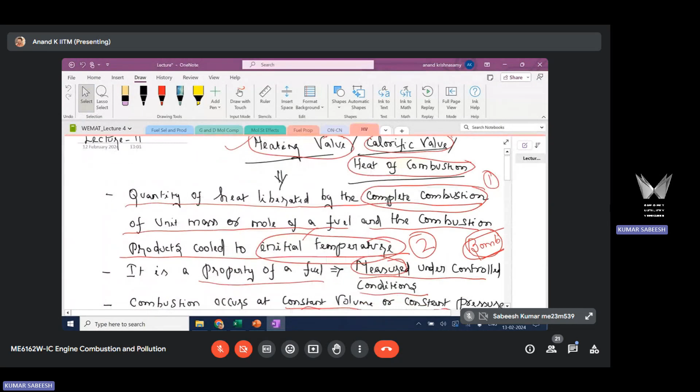But when you use an instrument like a bomb calorimeter to measure the heating value, you are actually measuring higher heating value. So you need to know how to convert this higher heating value into lower heating value. This is what we discussed in the last class, so now we know how we can do this conversion.

This is higher heating value on the left hand side, and on the right hand side you have lower heating value plus heat added by recovering latent heat of vaporization. When you condense vapor into liquid, heat is liberated - this is opposite to what happens when liquid is converted to gas, which absorbs latent heat. That latent heat, liberated from H2O, is added to lower heating value. This is how you get higher heating value.

So in the efficiency equation, you need to use this lower heating value. You need to know how many moles of H2O are found in the product - this is the only information you need. To get this, you need to know the molecular formula of the fuel.

So this is how we define the first law efficiency: work extracted by burning unit mass of fuel with respect to thermal energy released by burning unit mass of fuel. Work is not measurable in an IC engine context, so we use this fundamental equation and express it in terms of power. That is the second form of first law efficiency or thermal efficiency: power divided by m dot f into q with subscript c. This is the heating value, and we need to use lower heating value, as discussed.

After this, we started our discussion on adiabatic flame temperature. This is again one of the important parameters you need to know. This is the maximum temperature reached by the combustion product - a theoretical or hypothetical value. Then why are we interested in this theoretical or ideal value?

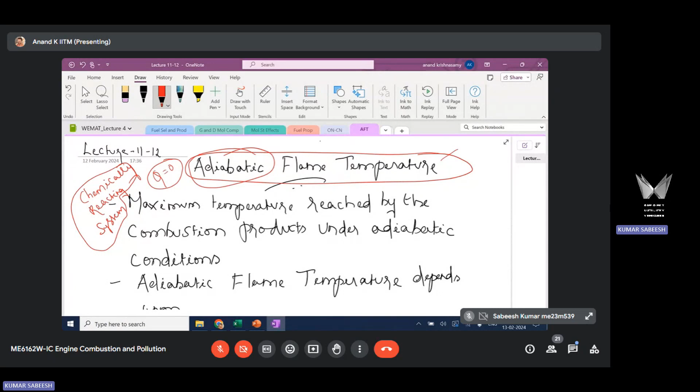So the temperature reached by the product after the combustion event is going to be maximum. That's why we say this is the maximum temperature reached by the products of combustion under adiabatic conditions, wherein there is no heat interaction between the system and surroundings - Q is 0.

We are interested in getting an estimate of this adiabatic flame temperature for two reasons. One, it will help us carefully choose the material to design the component for longer durability. Second, this temperature value also affects pollutant formation. Later on, I will discuss how the temperature value affects pollutant formation, but the temperature reached in the combustion system is vital information required to know how much pollutants are formed.

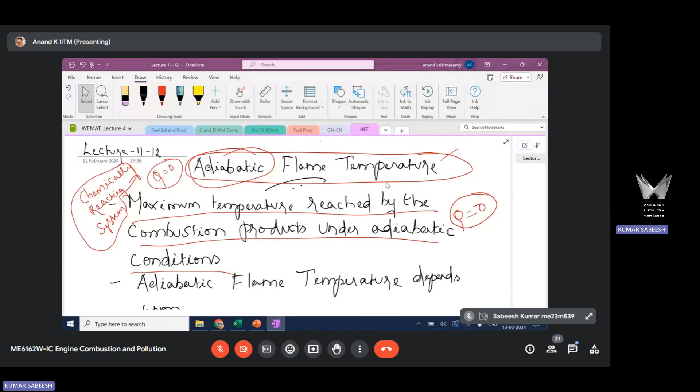For example, NOx, oxides of nitrogen, are highly sensitive to in-cylinder temperature. The maximum temperature reached in the combustion system fixes the maximum value of NOx formed in the system. So from the pollutant formation perspective, we need to know this temperature. From engine design perspective also, we need to know this temperature.

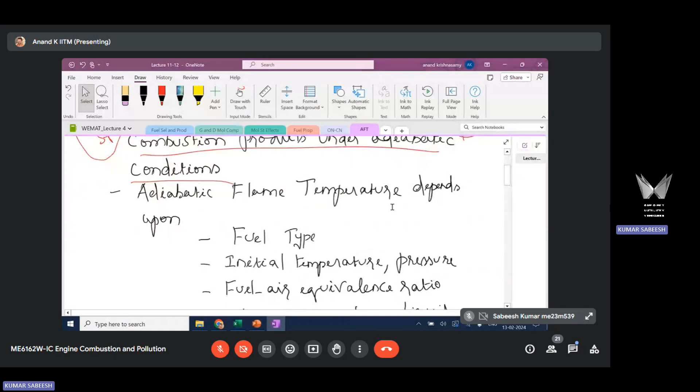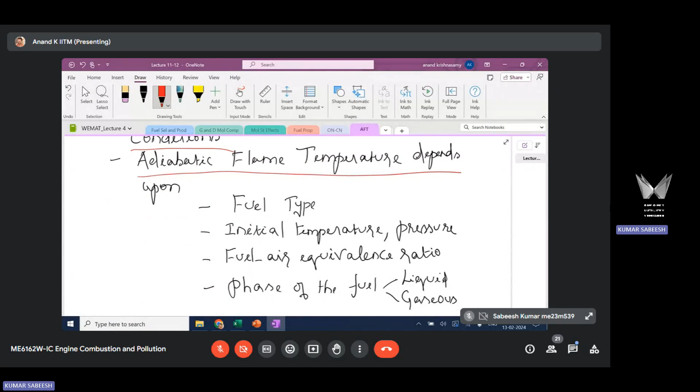That is the usefulness of this parameter, and that is the reason why we are focusing on how to get an estimate of this temperature by applying the first law. So now, before we see how we can derive an expression or estimate the adiabatic flame temperature, we need to know what variables influence this temperature value. So this adiabatic flame temperature depends on certain variables.

One of the important variables is fuel type, because the type of fuel that undergoes combustion fixes the maximum temperature value reached at the end of combustion. For example, if you combust gasoline or diesel, these are hydrocarbon fuels. They have a fixed value of carbon and hydrogen, and because of that molecular composition and structure, energy is released. So what is the energy source, the thermal energy source?

So when you talk about thermal energy released in combustion, what is the source for that energy? It's basically burning of fuel, sir. So you can say fuel is the energy source. When I say fuel as energy, what energy are we talking about in terms of fuel energy? Enthalpy of formation, sir, or chemical energy, right?

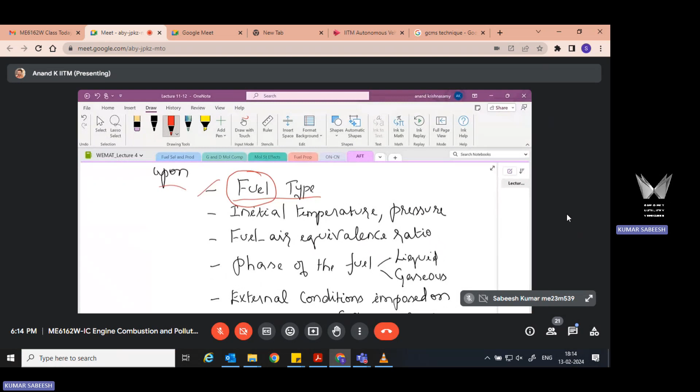Fuel as such possesses carbon with a particular molecular structure, so these are basically compounds. A compound is formed from an element through bonds. So it means some energy is already spent to form a compound from an element, and that energy is what we refer to as enthalpy of formation, or chemical energy.

During combustion, that energy is released as heat, and it appears in the product temperature, which slowly rises because of this thermal energy release. So we can say fuel has a strong influence on the temperature reached at the end of combustion, because fuel is the energy source. Depending on what type of fuel you burn, the temperature reached during combustion depends on it.

For example, if you burn diesel, you get one temperature. If you burn an alternative fuel like ethanol, as I said, it's used in the US along with gasoline, you get a different temperature, because the molecular composition and structure of those fuels differ from hydrocarbon fuel. Fuel is one of the important variables — this is what we refer to as adiabatic flame temperature.

The second variable is the initial temperature and pressure of the system. Again, system means a fixed mass of matter. Depending on the initial conditions of the system, temperature and pressure, the final temperature reached at the end of combustion depends on it. For example, if you look at the engine context, fuel and air, if it...

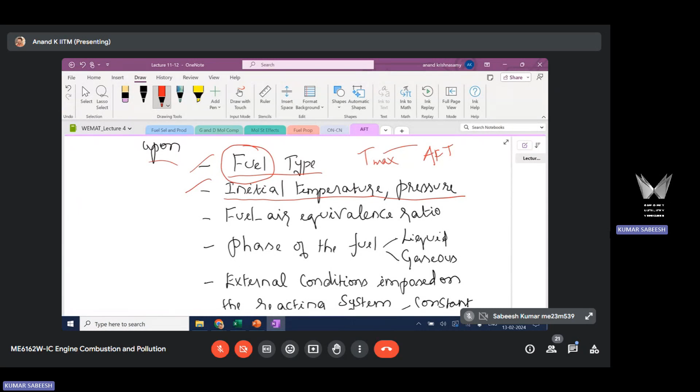If you provide any preheating before it is sent into the engine cylinder, it increases the final temperature. Similarly for pressure — pressure can be ambient pressure, but if you use a turbocharger or supercharger, you increase the initial pressure. Once you increase the initial pressure, the final flame temperature is also higher. So based on the initial temperature and pressure conditions, the maximum flame temperature will be different.

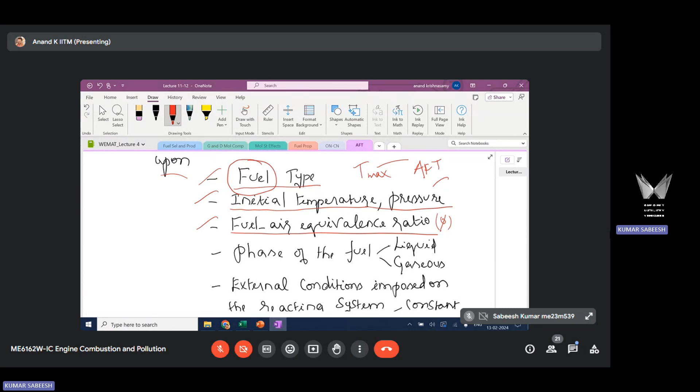The third variable is fuel-air or equivalence ratio, phi. We have already discussed phi when we covered the stoichiometric principle. So, if phi is less than 1, it is a fuel-lean condition. When phi is greater than 1, it is a fuel-rich condition. Now my question to you is, will the temperature be high? Just lean, sir. Not very, just lean, like 0.9.

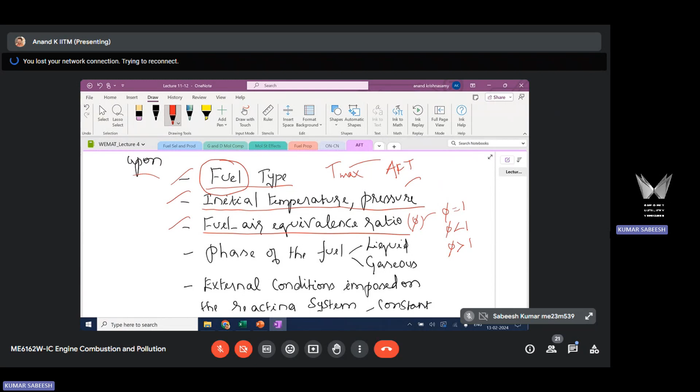Slightly lean. Any other answer? Why do you think slightly lean is going to increase the maximum temperature? So that is basically because if the fuel is rich in the system, so because of some heat is also...

Okay, does stoichiometry also ensure complete combustion, right? Does stoichiometry ensure complete combustion? It can happen with stoichiometry also, right? Yes, sir. But I've told you that basically the latent heat of evaporation of fuel will be a very minimum phenomenon at phi less than 1 and phi more than 1 and phi equal to 1.

Whereas phi slightly lesser than stoichiometric will have that phenomenon completely absent, and that will help the flame. No, I do not agree with that. I will talk about that when I discuss the phase of fuel and its effect, latent heat effect. That is what you are talking about.

Okay, so here there are some other dominant effects. Maybe you should think about other dominant effects rather than the latent heat effect. Latent heat effect, I'm going to talk about next.

Sir, in ideal case it should be when phi is equal to 1. So you are saying this will increase max temperature. And the other answer is slightly lean will increase max temperature.

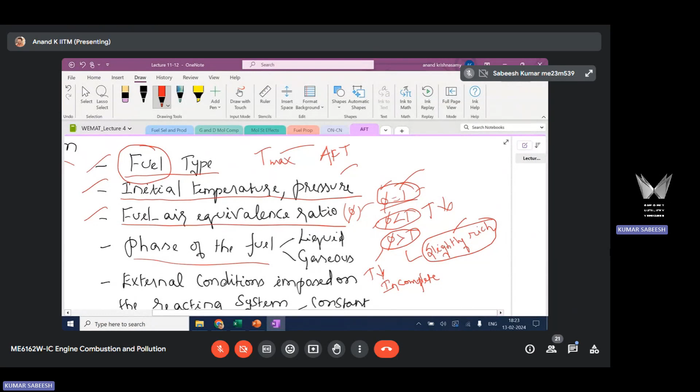So this is the effect of equivalence ratio on the maximum combustion temperature reached due to the combustion event. Then there's the phase of the fuel, which also affects maximum flame temperature, because fuels may exist in liquid phase or gas phase. Please note that combustion is a gas phase phenomena. When you introduce liquid phase fuel, and our conventional fuels, gasoline and diesel, are liquid phase fuels, they exist in the liquid phase under ambient conditions. Combustion is a gas phase phenomena, so how do you convert this liquid phase to gas phase?

By adding heat. And what is that heat referred to as? Latent heat of vaporization. So you need latent heat of vaporization to convert liquid phase fuel into gas phase fuel, in case you are using a liquid fuel, which is what we are using with conventional fuels. So we need to convert this into gas phase. So where is this latent heat obtained from in a combustion system, an IC engine combustion system, SI and CI engine? You need latent heat because combustion is a gas phase phenomena. Where is this latent heat obtained from?

Chamber walls? How can chamber walls supply energy? In CI engine, we pressurize the air. In SI engine, we pressurize the air fuel mixture. So by pressurizing the air, it increases the temperature. And in case of SI engine, we provide a spark that gives an instant flame, and that increases the temperature.

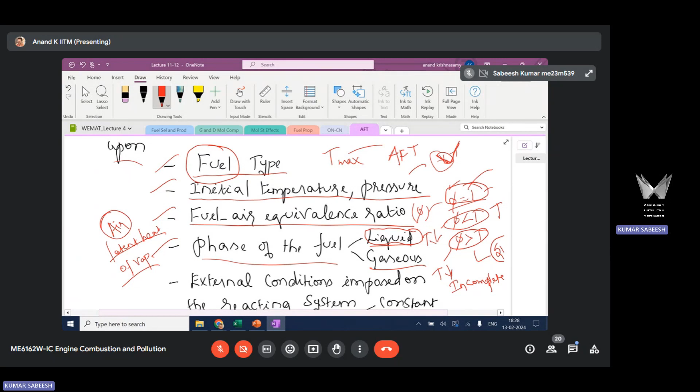The other variable is the external conditions imposed on the chemically reacting system. The system can undergo a combustion event under two conditions: one is constant volume combustion, the second is constant pressure condition. In which case will the maximum temperature be higher?

Constant volume, sir, because there is no work involved. So here the maximum flame temperature is going to be higher compared to constant pressure, because in a constant volume combustion system there is no flow work. There is something called flow work.

In a constant pressure system, the flow work is there because you are spending some energy to move the fuel and air into the system, and spending some energy to move the products out of the system. So some amount of energy is utilized for flow work in a constant pressure system. If you have a constant volume system, there is no flow work. So the maximum temperature reached will be higher in a constant volume system because of this reason.

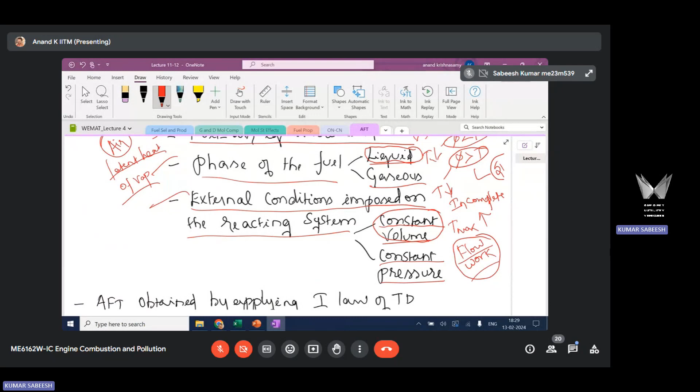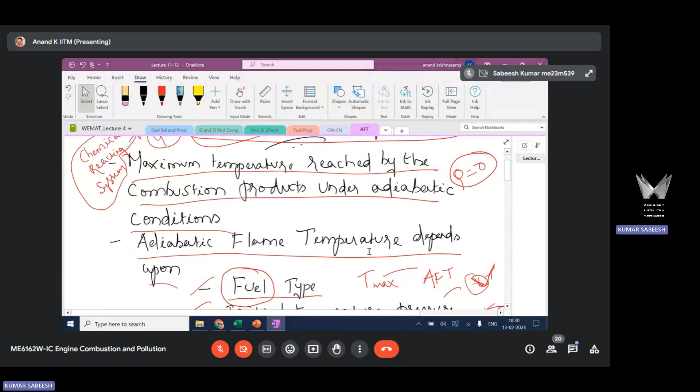So these are the variables we understood that affect the maximum flame temperature. This is also important to understand, because we need to know what variables affect the maximum combustion temperature. Now, with that understanding, we are moving ahead to see an expression for finding adiabatic flame temperature by the first law of thermodynamics.

So we are considering first a constant pressure combustion case. We are going to get an estimate of adiabatic flame temperature for this constant pressure combustion. As I said, we are applying the first law of thermodynamics to a chemically reacting system to get an estimate of adiabatic flame temperature.

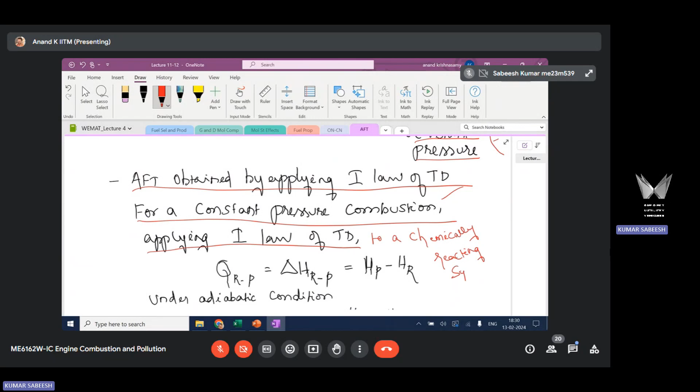When you apply the first law, you can write it as Q minus W equals delta U. This is the basic equation from where you arrive at Q equals delta H. Since it's a constant pressure combustion system, if you combine W and delta U, you get H, enthalpy. Enthalpy is U plus PV. So from this you can write it as Q with a subscript R to P.

This R stands for reactants and P stands for products. This is the standard nomenclature followed to indicate a chemically reacting system. Initially the matter is in the form of reactants, fuel and air; after combustion it is in the form of products. So Q R to P equals delta H R to P. This is for a constant pressure combustion system. This delta H R to P can be written as HP minus HR.

Since we are considering adiabatic flame temperature, Q will become 0, because it's adiabatic. So you can write HP minus HR equals 0, meaning HP equals HR under adiabatic conditions. So by equating the enthalpy of the product and the enthalpy of the reactant, you will be able to get an estimate of adiabatic flame temperature. This is an outcome of the first law of thermodynamics, giving HP equals HR for a constant pressure combustion system.

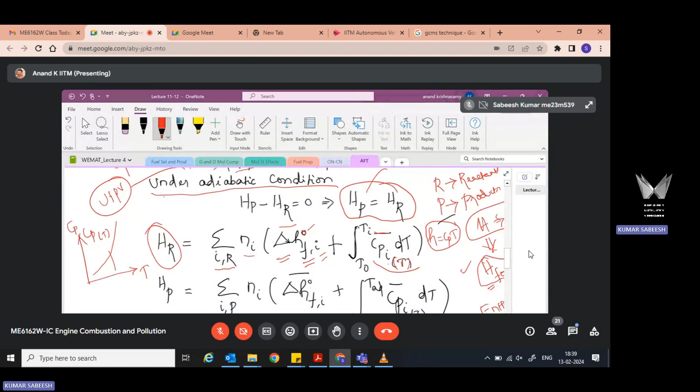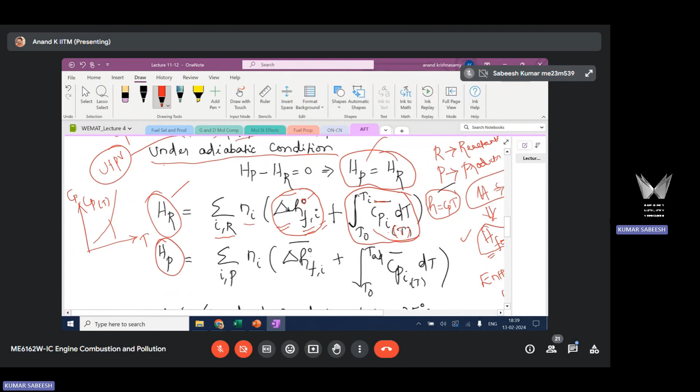Now you have two components. The first one is enthalpy of formation. Second one is sensible enthalpy expressed in terms of Cp, which is a variable with respect to temperature. This is for the reactant. Then for the product, Hp equals the same equation, summation of i comma P, Ni is number of moles of species i. You have two components: one is enthalpy of formation, second is sensible enthalpy expressed in terms of Cp.

Because Cp is a function of temperature, when you look at the temperature range of the integral for reactant, it is from T naught to Ti. For the product, it is from T naught. T naught is the temperature under standard condition, which is 25 degrees Celsius. Ti can be anything, Ti need not be 25, right? Exactly, so that's why we account for that through sensible enthalpy for reactant. For product, the temperature is adiabatic flame temperature, which is much higher than T naught. So you are integrating from T naught to T adiabatic, which is adiabatic flame temperature.

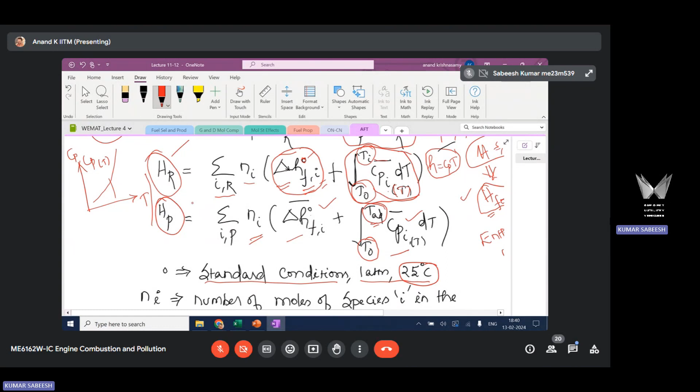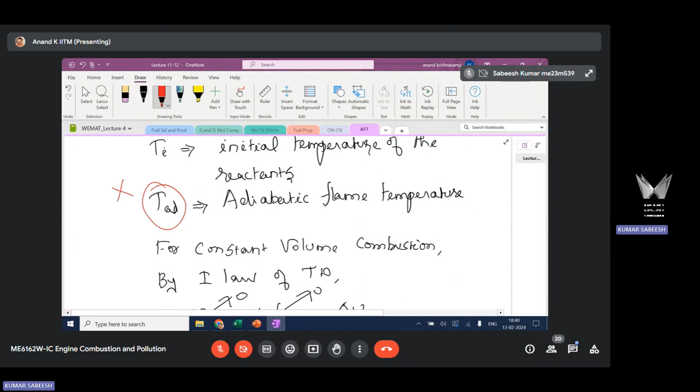So you are equating HR and HP to get the value of adiabatic flame temperature. In this equation, the only unknown is adiabatic flame temperature. You will get Cp from standard table. Delta HF for various species are available from standard thermodynamic tables. Cp and HF are available, only unknown is T with subscript AD, which stands for adiabatic flame temperature. So by equating HR and HP, you will be able to get this unknown. So the only unknown here is adiabatic flame temperature, which you get from the first law equation, HR is equal to HP.

So for a constant volume combustion, yeah. Sir, for reactants, is it considering the gaseous form, or is it including both liquid and gaseous form? It's gaseous form, so whatever we are talking about here is in the gaseous form. Okay sir. The phase change is accounted for through latent heat.

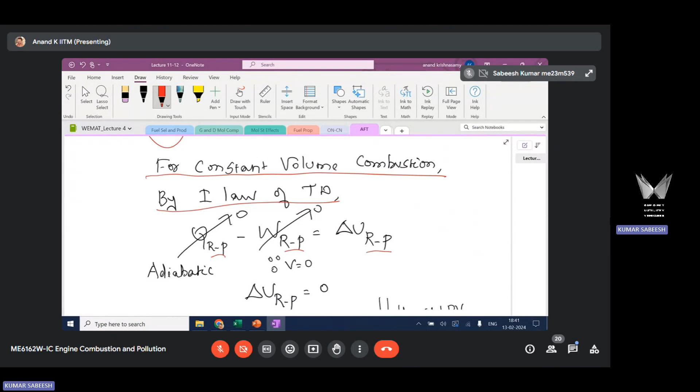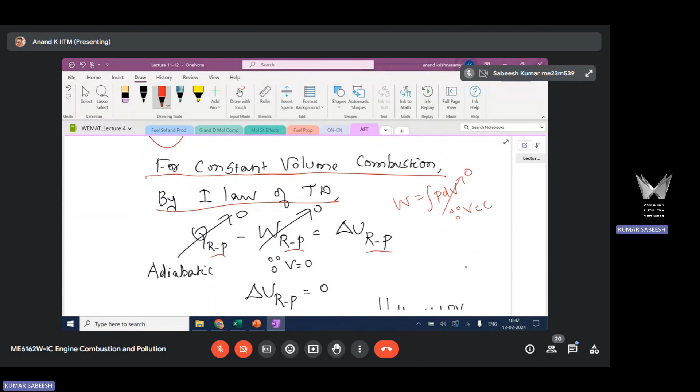Okay sir. Now for a constant volume combustion, you can write the first law equation. Again, it's a chemically reacting system, indicated with this symbol R to P. By first law equation, you can write Q minus W with subscript R to P is equal to delta U R to P. Since volume is constant, there is no displacement work, so W becomes 0. You know W equals integral P dV, and there is no dV term here because volume is constant. So W becomes 0 here, and Q will also be 0 because we are considering an adiabatic system, with no heat interaction between system and surrounding. So the first law equation reduces to delta U R to P equals 0, because Q is 0 and W is 0. From that you can write UR is equal to UP.

So here for a constant volume system, we are equating internal energy, total internal energy of reactant and total internal energy of product to get the adiabatic flame temperature. Internal energy is very difficult to get from any standard table, but you can always express internal energy in terms of total enthalpy. You know this equation, H equals U plus PV. So you can express U in terms of H and PV. This PV can be expressed in terms of N R bar T, the equation of state. There are different forms of equation of state. I prefer to use this form because we are writing any combustion equation on mole basis. As I said in the beginning, PV equals N R bar T is the equation of state we will use here, because we are writing the combustion equation on molar basis.

So if you consider UR, you can write it as HR minus PR VR. UP can be written as HP minus P with subscript P, V with subscript P. This P stands for product, R stands for reactant. Now again, HR minus PR VR, this PR VR can be expressed in terms of N R bar T from the equation of state. What is this R bar? R bar is the ideal gas constant, 8.314. Yes, this is the universal gas constant.

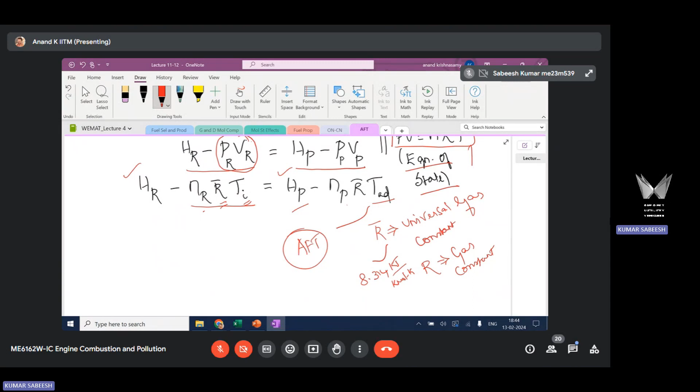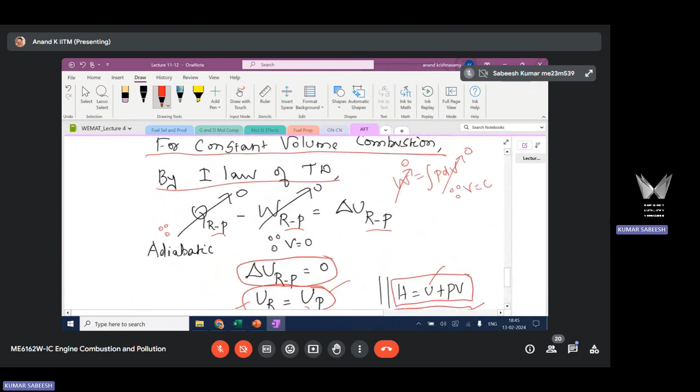We already know that we can get this HR and HP from standard tables. Now here again, the unknown is T adiabatic, which is the adiabatic flame temperature. By equating UR with UP, you will be able to get an estimate of adiabatic flame temperature for a constant volume combustion system. So that is how you get an estimate of adiabatic flame temperature for a constant volume and constant pressure combustion system, by applying the first law of thermodynamics.

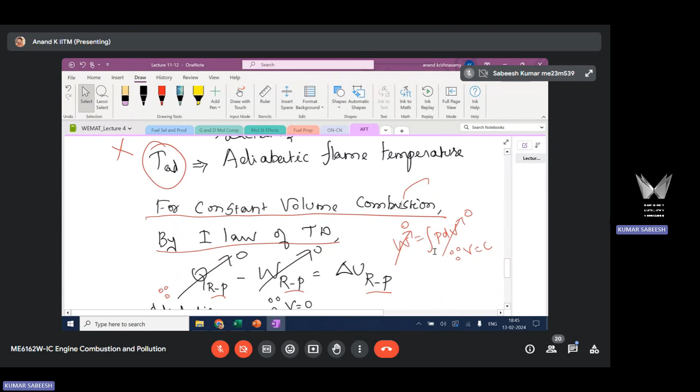So what we have discussed now is application of the first law of thermodynamics to study combustion. We derived two parameters. One is heating value, which is an estimate of thermal energy released during combustion. The second useful parameter is adiabatic flame temperature, which provides an estimate of the theoretical maximum temperature reached during combustion. So we have discussed how we can apply the first law of thermodynamics to get these two useful parameters.

Next, moving ahead, we are going to see how we can use the second law of thermodynamics to get a condition for chemical equilibrium. Earlier we discussed that this stoichiometric principle provides you combustion products with a maximum product composition of 4, because you only have 4 atom balance equations. So you cannot get more complex product information by applying this stoichiometric principle.

Considering that, we can use the chemical equilibrium concept to form additional equations so that we can get an estimate of product composition. Please remember that as a result of combustion, various products are formed. We need to know about the composition of the product. What do you mean by composition of the product? The number of moles of various species which are formed.

When you do experimental measurement, you use an emission analyzer to get an estimate of the product composition from the combustion, because some of them are pollutants. So with stoichiometry, you can get only a minimal number of products. That's why we are moving ahead. We are going to now see how we can apply a concept called chemical equilibrium so that we can get more products and get the composition of more products by doing this.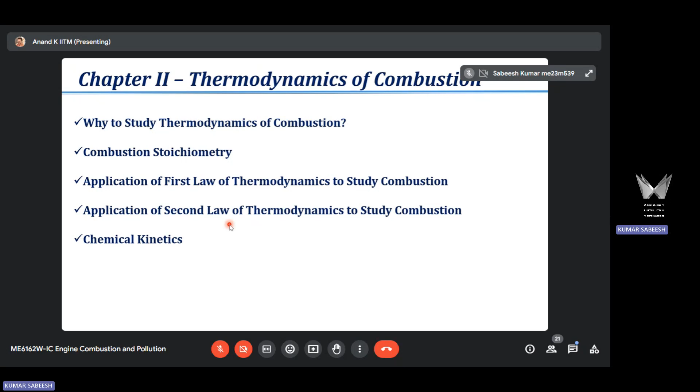So we are going to see what this chemical equilibrium is, and how useful this chemical equilibrium concept is in terms of estimating the product composition. That's what we are going to see here. This concept is helpful to determine the composition of the combustion product. We need to know about the composition of the combustion product because some of them are pollutants.

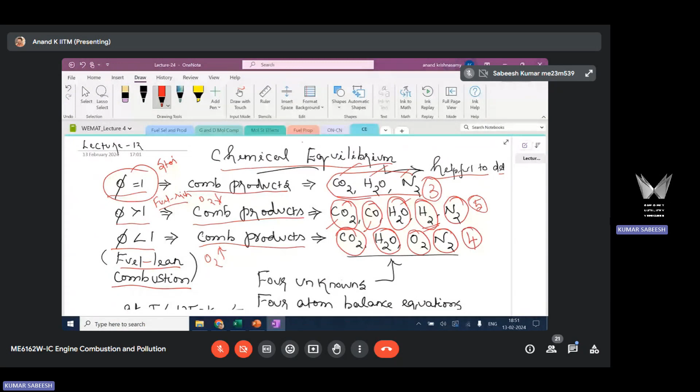Apart from this, you have one more added. Oxygen is added because you are doing fuel lean combustion. There is more air, excess air, that appears in the combustion product. Oxygen will also be a major species if you have fuel lean combustion. Now how many products are there? How many species are there? 4. So you have 4 species here when Phi is less than 1 under fuel lean combustion.

So how many equations can you form from stoichiometry? You have 4 unknowns here. How many equations can you form from stoichiometric principle? 4 equations, because you have 4 atoms. You are doing an atom balance, you can form at the most 4 equations. What are the atoms we are talking about? In the fuel, you have carbon and hydrogen. In the air, you have oxygen and nitrogen. So you have only 4 atoms, with that you can form at the most 4 equations.

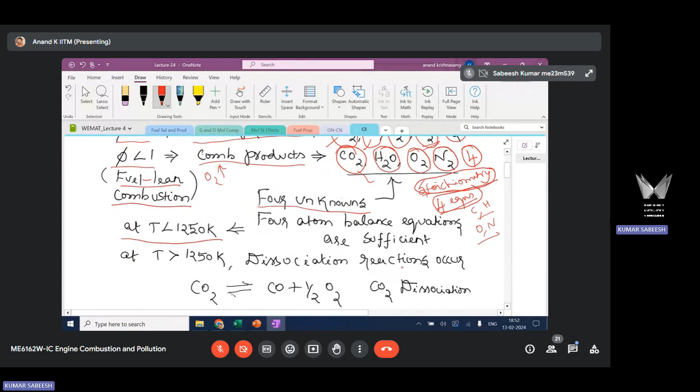So these 4 unknowns, whatever you are seeing here with fuel lean combustion, can be obtained by doing stoichiometric principle. By applying stoichiometric principle, you can get the product information, product composition. This is the case when the temperatures are less. I have given a threshold temperature value - when temperature value is below 1250, there are only 4 unknowns. So 4 atom balance based equations are sufficient to get the information about the number of moles of these 4 species.

This is what I mean by product composition. Suppose if the temperature is above 1250, then some other reactions are going to happen. Those reactions are called dissociation reactions. Dissociation reactions are basically endothermic reactions, meaning these reactions absorb thermal energy. Combustion is exothermic - the exothermic reaction will release thermal energy, endothermic reaction will absorb thermal energy. So at higher temperature, dissociation reactions happen by absorbing thermal energy.

CO2 and H2O are stable species. When the temperature increases, the stable species will start to dissociate. You could see here that this is a typical CO2 dissociation reaction - carbon dioxide dissociates and forms CO and oxygen. H2O dissociates and forms hydrogen and oxygen. This is H2O dissociation. These 2 are the major dissociation reactions in IC engine combustion.

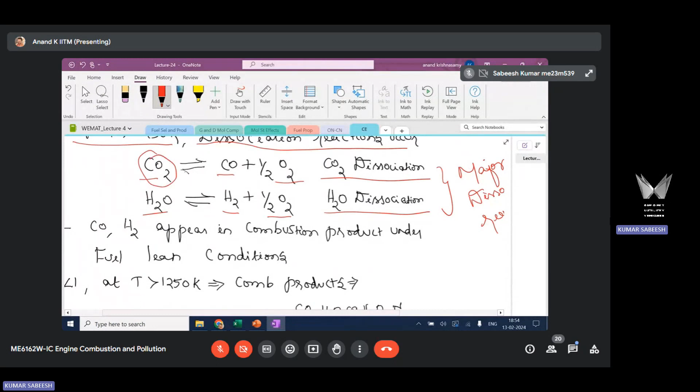So this is going to happen in a real engine also, real engine combustion also. These are the major dissociation reactions. Now what you could observe here, CO2 as such is stable, but when the temperature increases above 1250 - and in IC engine combustion, these temperatures are very well reached, you will reach well above 1250 - so what is happening because of that? CO2 starts to dissociate and form CO. H2O is stable at low temperature, but at this temperature range, it is dissociating and forming H2.

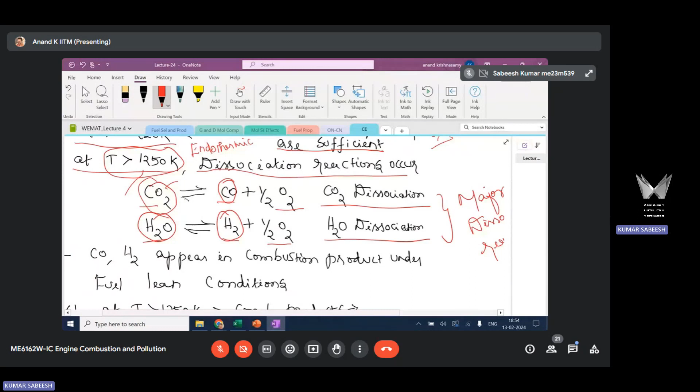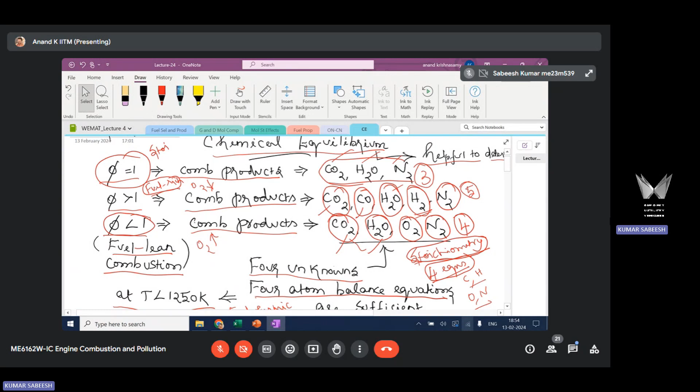What we have discussed earlier, CO and H2 are available in fuel-rich combustion. Please note that only in fuel-rich combustion you can expect CO and H2, because these are products of incomplete combustion. But what we are seeing here, even with fuel-lean combustion, even with excess oxygen, you will have this incomplete combustion product, CO and H2.

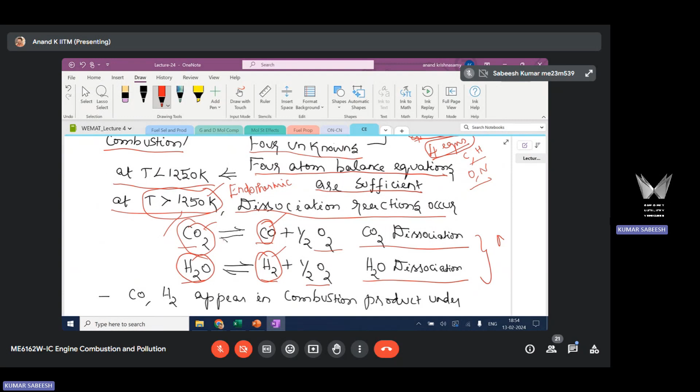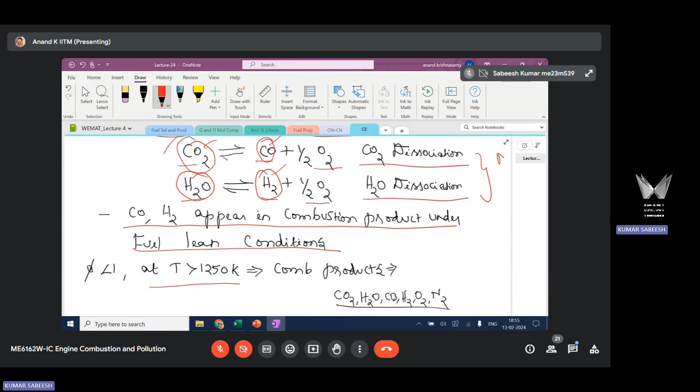Suppose the temperature increases above 1250. Even with lean combustion, fuel lean combustion, CO and H2 appear in the combustion product under lean condition, provided the temperatures are above 1250. Now, how many unknowns are there in the product? How many species are there? You have CO2, H2O, O2, N2, standard species.

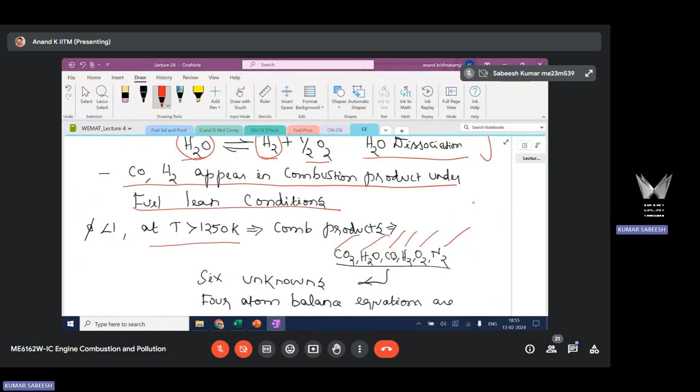Because of dissociation, CO and H2 are also added. Now how many are there? You have 6 unknowns at high temperature. So 4 atom balance equations are insufficient to estimate the composition of the combustion product. You cannot apply stoichiometric principle and get the information about product composition at high temperature.

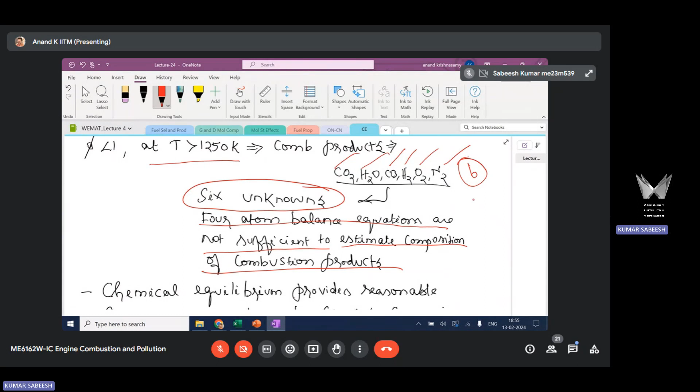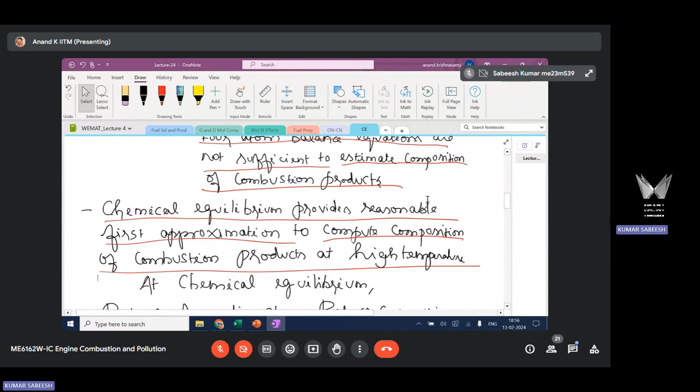This is where chemical equilibrium concept is useful. It provides reasonable approximation to compute composition of combustion product at high temperature. So at higher temperature, you are going to get more number of species, and you can have an estimate of that product composition if you apply chemical equilibrium concept. By applying this concept, we are going to get the number of moles of these many species, which is not possible with stoichiometric principle.

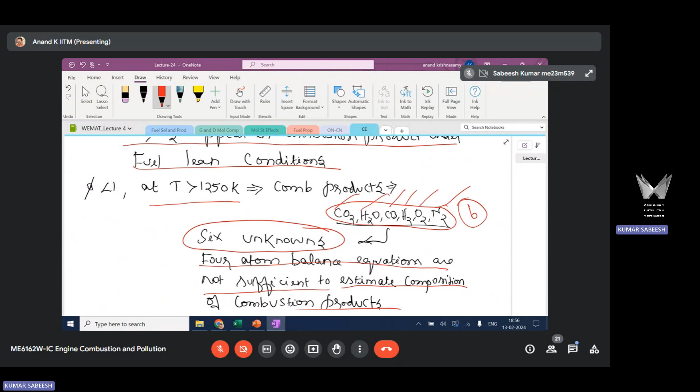Sir, why was NOx not considered in fuel-lean conditions? NOx is not considered, as I said, the temperatures are less. NOx will form at well above 2000 Kelvin.

This is an assumption actually, these are the major products. NOx will be there at the ppm level. When you measure NOx, you know it is at ppm level, right? Parts per million, 1 by 10 power 6. We are ignoring all those minor species here in this analysis. Okay sir, thank you sir.

Any question? So for phi greater than 1, we are directly getting CO and H2. So in that case, what is the temperature in that condition? That is, at any temperature you are going to get CO and H2. What I have demonstrated here with lean combustion is when the temperatures are less, you will have less number of species. When the temperatures are more, even with lean combustion, you are going to get CO and H2.

So basically what I want to convey is the number of species in the product, major species in the products, is going to increase when the temperature of the combustion system increases. Noted sir, it will be more or less greater than 1250 Kelvin, correct? Yes. So you will have more species. You cannot find the product composition by applying stoichiometric principle alone.

So fine, my question was that the 6 species for phi less than 1 and temperature more than 1250 Kelvin, that will be holding true for even phi more than 1, right sir? For phi more than 1, even the normal number of species itself are high. Okay, that was 5, normal in the sense at any temperature. Yes, it was 5 actually right? Yeah, 5. So you cannot find the product composition with the stoichiometric principle alone, because at the most you can form only 4 equations, meaning you can find only 4 unknowns. So whenever the product number goes more than 4, we have to apply the chemical equilibrium concept.

So what I am going to show is how it will be helpful by taking a case study. What is generally done is you will apply stoichiometric principle, get 4 equations, then form an additional equation by applying chemical equilibrium principle. Those additional equations will be helpful in solving and finding the product composition. Okay sir, thank you, okay fine.